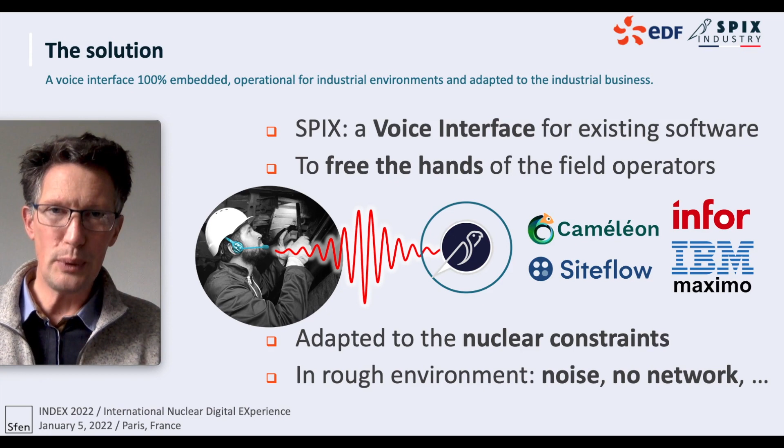Of course, there is noise everywhere, and it needs to be reliable, and there is no network. So we need to cut the internet wire and have a system that is efficient in such an environment. So the voice assistant from SPIX Industry is embedded, works offline in noisy conditions, and is operational whatever condition the user is confronted with.

So today we are in an experimentation phase with EDF on different sites under commissioning, with an interface between our voice assistant and Caméléon, which is the software used by EDF to generate all the reports from the site inspections. And the validation will be made for safety visit reports, which is a daily activity from EDF operators.

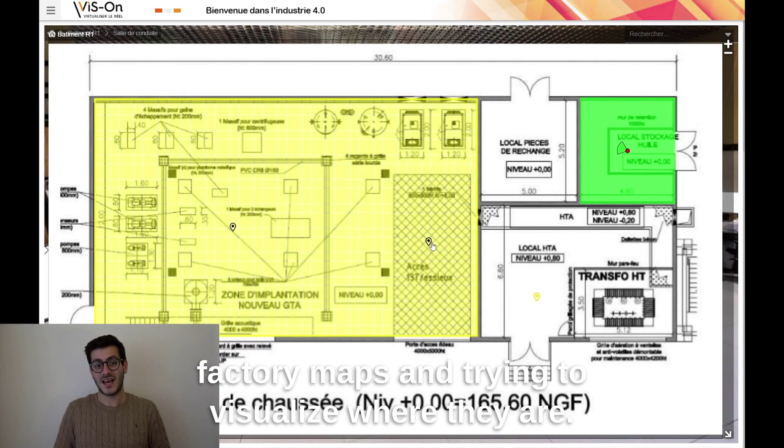How did SBS Interactive come about to create VIS-On? Our first hint was realizing that in the industrial world, the staff were always on the lookout for factory maps and trying to visualize where they are. And their maps weren't always up to date.

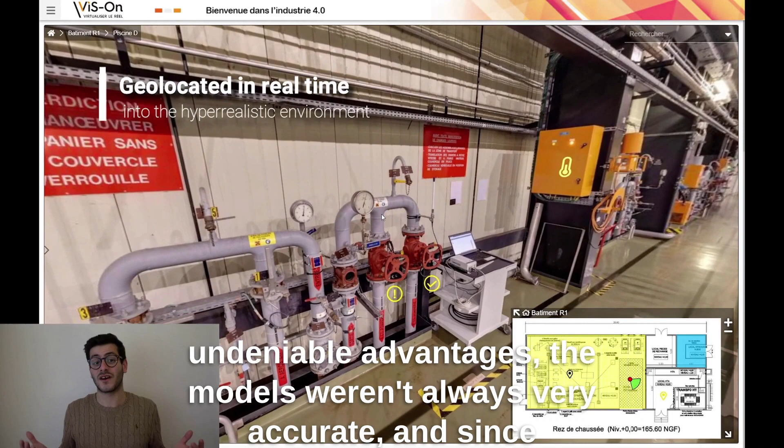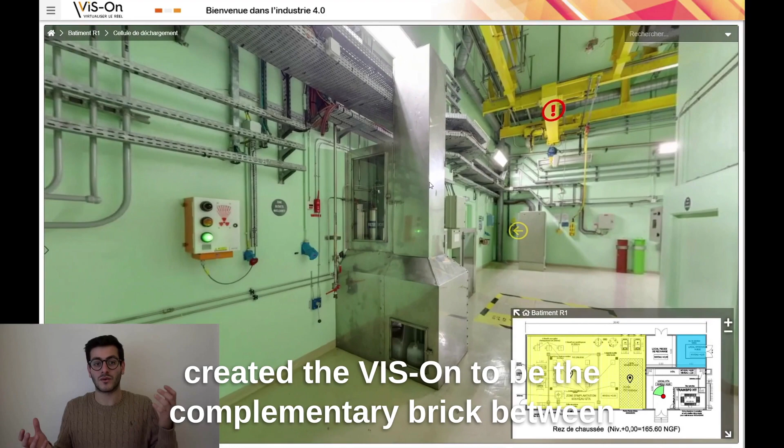Then came the 3D digital models, but with those undeniable advantages, the models weren't always very accurate. And since the projects tend to be time consuming, it came with a hefty price tag. That's when SBS Interactive created VIS-On to be the complementary brick between the blueprints and the 3D designs.

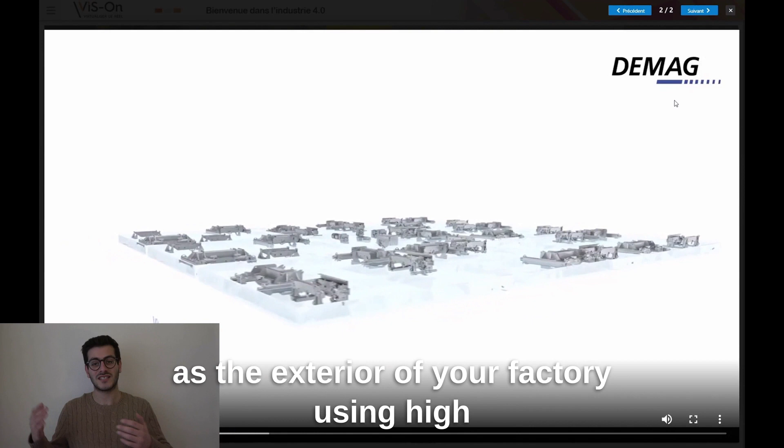The goal was to stay as accurate as possible to the real world. It can be operated simultaneously by all the staff. It's also a collaborative platform where users can create new projects, add documents, or link it to other platforms or applications. VIS-On lets you navigate the interior as well as the exterior of your factory using high-resolution 360 photos or 3D scans.

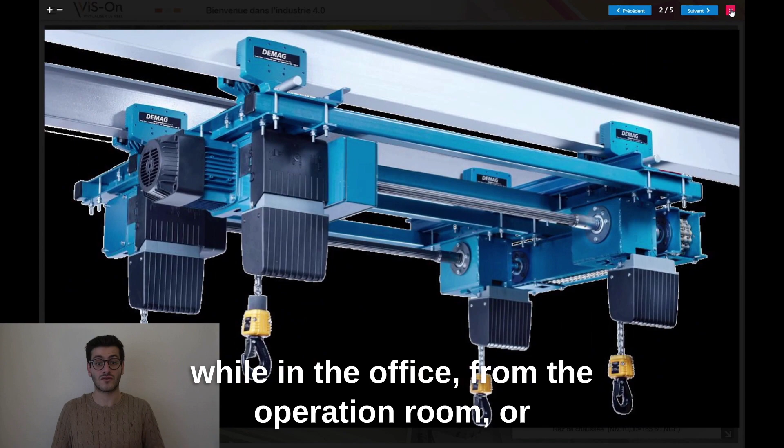VIS-On is a supervision tool that you can use while in the office, from the operation room, or even while on a mission on site. You can visualize instantly using 360 photos and have access to all the necessary information and digital tools through a laptop, a touchpad, or even a smartphone.

It helps the maintenance staff understand all the aspects of the repairs that need to be done, to know all the security instructions, but also get informed on any radiological risk.

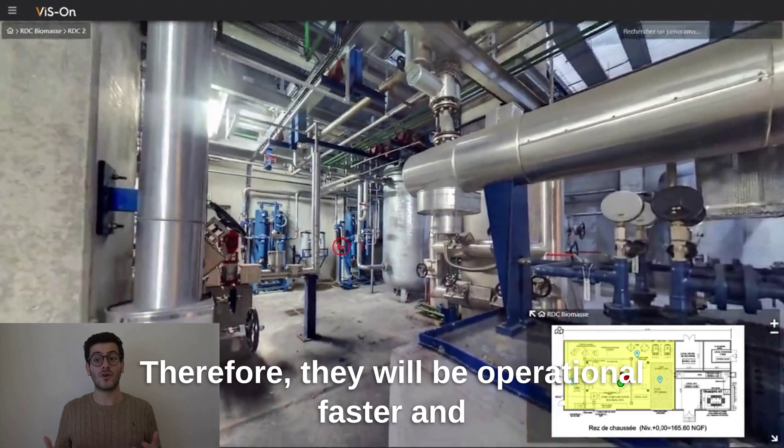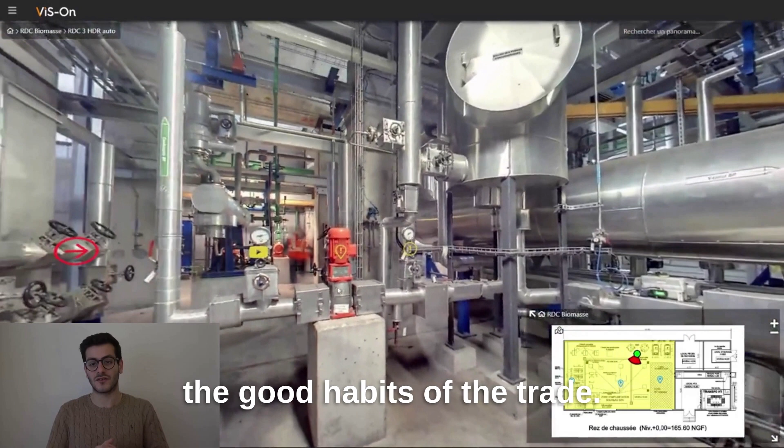VIS-On will accompany the newcomers during their first hours so that they can familiarize themselves with different environments of the factory. Therefore, they will be operational faster and we can limit the chances of error. Furthermore, the new apprentices will have access to tutorial videos accessible through VIS-On to pick up the good habits of the trade. VIS-On was created to handle security on big-scale projects, nuclear sites, or even industrial plants.

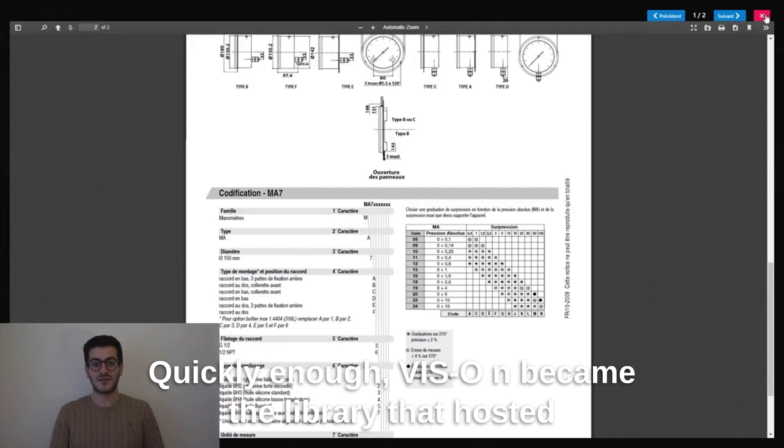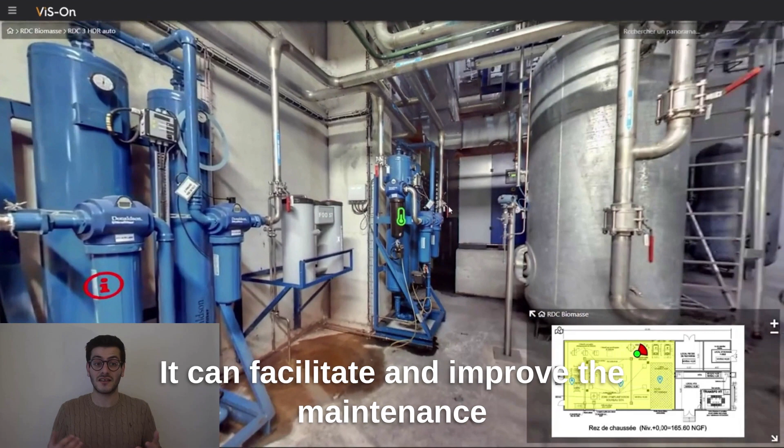Quickly enough, VIS-On became the library that hosted easy access to all the technical information. Then we created a link between VIS-On and computerized maintenance management systems, also known as CMMS, to be able to identify all the equipment, the history of all the maintenance staff intervening on each instrument, and a documented maintenance memo. It can facilitate and improve the maintenance of the equipment, but also inform quickly the staff about any malfunctions.

VIS-On also integrates a mode with supervision over a site, with an update on all configurations and thus have the history of all the modifications.

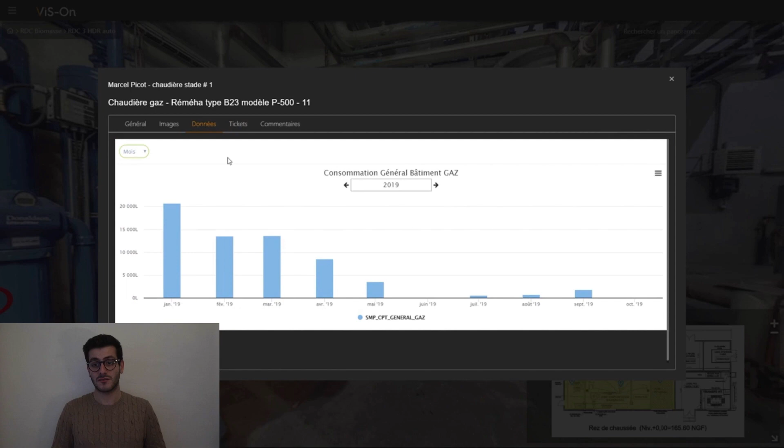SBS Interactive offers the option of hosting all the data on our own servers, but considering the high importance of the data of our clients, we can provide the option of hosting everything on the company servers. For more than 15 years, SBS Interactive has been developing the VIS-On software to meet the security constraints of our nuclear and defense customers and guarantee a high level of confidentiality.

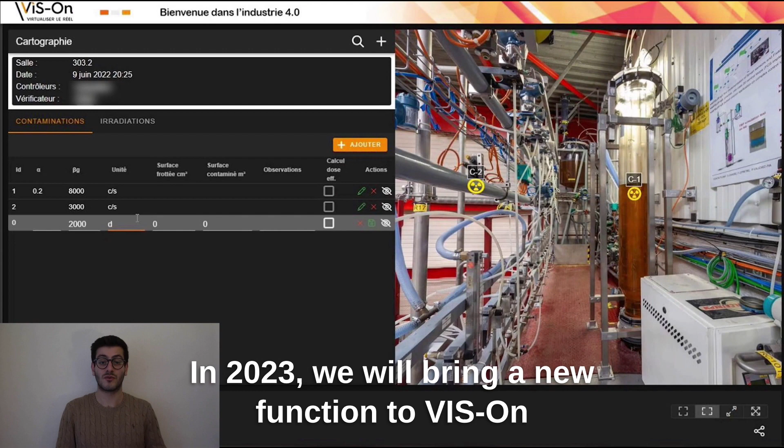In 2023, we will bring a new function to VIS-On, the possibility to add radiological zones not only on the maps but also on the 360 degree photos. Indeed, the radiation protectionist will be able to add radiological measurement points directly and easily on the 360 degree photos.

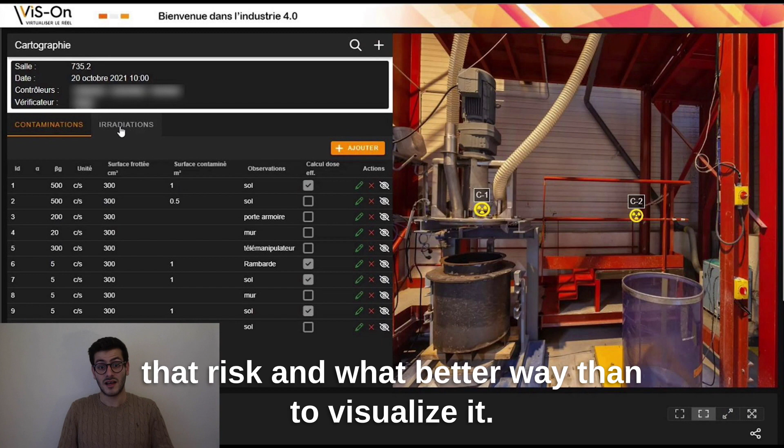It's very important to know exactly where the radiological risk is in a room and what is the importance of that risk, and what better way than to visualize it. Moreover, as VIS-On is shared with all the teams, users can know the latest radiological values measured and thus avoid unnecessary risks and take all the precautions.

Problem and challenge of plant operators. All power plant operators have the same problems. They have a huge number of industrial assets like pumps, valves, pipes, and heat exchangers. Due to some constraints like design, manufacturing mistakes, and/or operational loads, etc., some production relevant power plant assets can fail earlier than expected. And as a consequence, they can reduce the productivity and cause a higher operational cost.

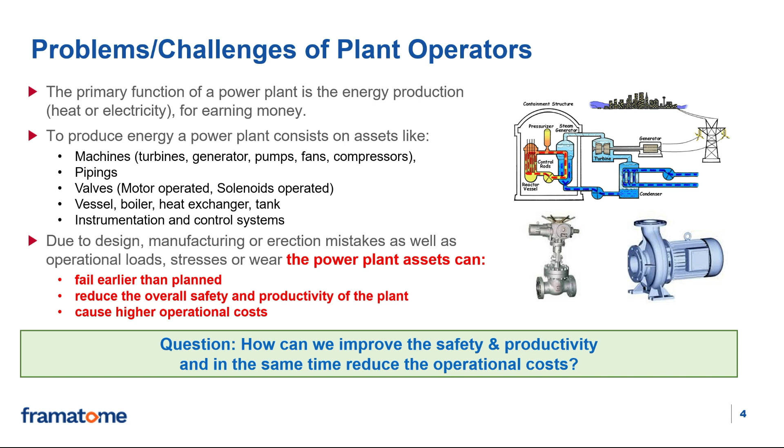So, to improve the productivity of the plant and at the same time reduce the operational cost, power plant operators have to collect equipment data. The first objective of the data collection is condition monitoring for early fault detection. The second objective is data analysis for problem investigation and confirmation. The third objective is diagnosis of critical severe problems, estimation of the remaining time to failure, and recommendation of remedial actions. The fourth and last objective is to verify the correctness of the maintenance activities and the accuracy of the diagnosis.

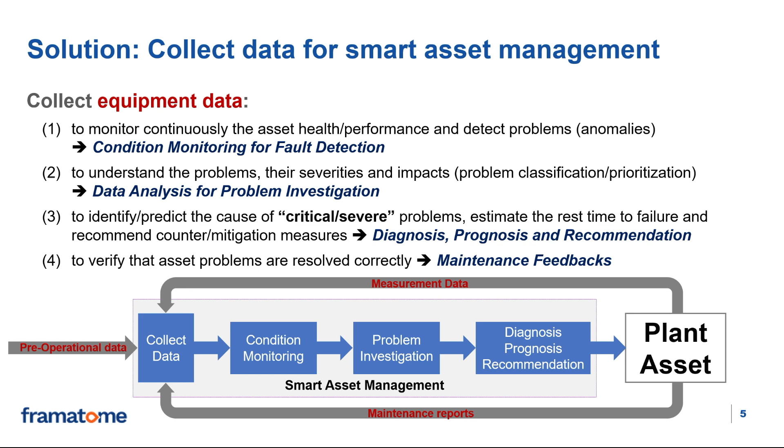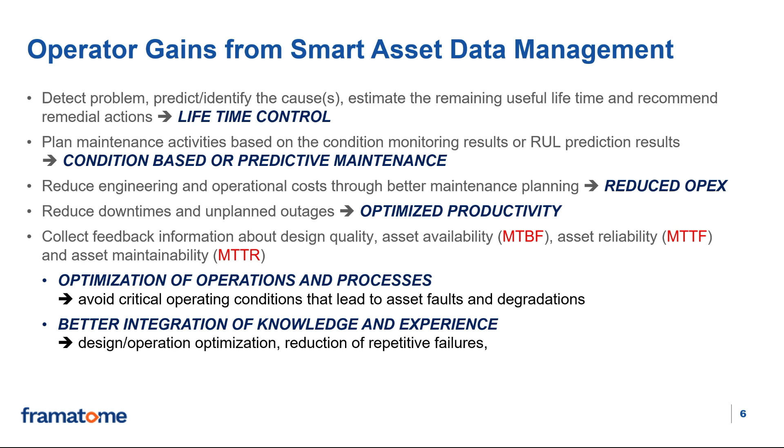The expected gains from a smart asset management are better asset lifetime control, better plant maintenance and engineering activities, reduced operational cost, optimized productivity, optimization of operation and processes, and better integration of knowledge and experiences.

So now, what's the Framatome solution?

Framatome Lifetime Department offers products and services for data collection, condition monitoring, diagnostics, and data-driven maintenance.

We have monitoring solutions for the reactor coolant system based on vibration monitoring, acoustic loose part monitoring, and leakage monitoring. These solutions are commonly requested by safety regulation. In addition, we have monitoring and diagnostic solutions for rotating machinery like pumps and non-rotating machinery like pipes and heat exchangers, as well as solutions for motor operated control valves.

Finally, we also offer a fatigue monitoring system named FAMOS-E. All of our M&D systems acquire, monitor, and store different kinds of sensor data, which can be exported as condition and/or process data using standard communication interfaces.

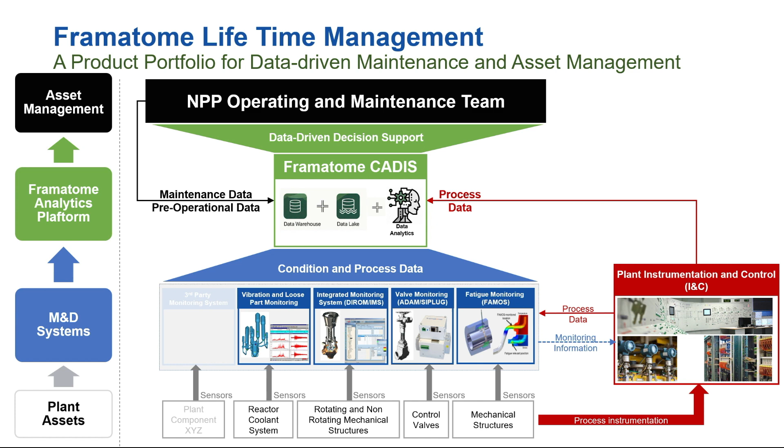To improve the intelligence of our M&D system, we have been developing a data analytics platform solution called CADIS for several years. This solution is currently used in two ways: internally at Framatome as a standalone system, and externally in power plants in combination with existing power plant M&D systems, as you can see on the slide. So CADIS is a kind of configurable data storage and digital intelligence that automatically transforms collected equipment data into diagnostic information and analytic insight for decision making and plant asset optimization.

CADIS requires measurement data like condition and process data, as well as operational logs or maintenance reports. These data, also called raw data, are collected into the CADIS data storage. Then the raw data are transformed into diagnostic information or feature data using signal or natural language processing. After that, analytic insight like anomaly detection, fault pattern recognition, and RUL estimation are derived from the feature data using basic or advanced data analytics models.

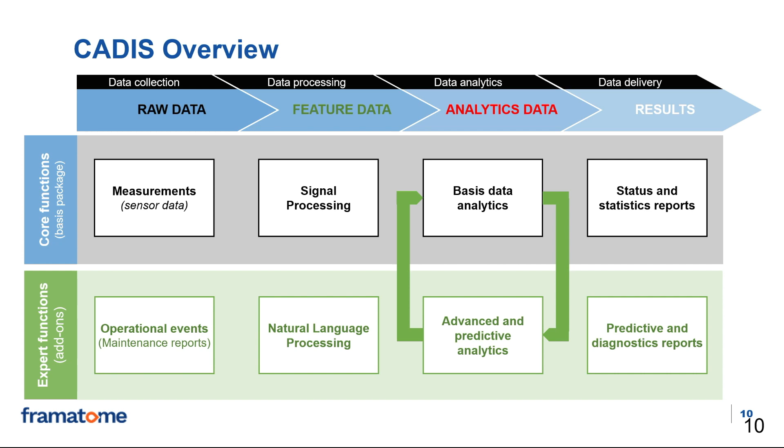Using plant supervision apps, plant operators and maintenance planners have at their disposal an online information system displaying required analytics and feature data of the CADIS system, helping them to understand, operate, and maintain the plant equipment better and make faster, more reliable decisions to reduce risk.

Using visual analytics tools like Jupyter Notebook, data scientists and data experts can access all CADIS data for data exploration, data understanding, and analytics model review and/or creation.

Using expert tools, diagnosticians like pump experts, valve experts, and primary circuit experts can review all data available inside the CADIS system for problem investigation, diagnosis, prognosis, and recommendation of remedial action.

Finally, to be mentioned, all data inside the CADIS system can be put at the disposal of connected third-party systems, the so-called CADIS data export, which is not shown here.

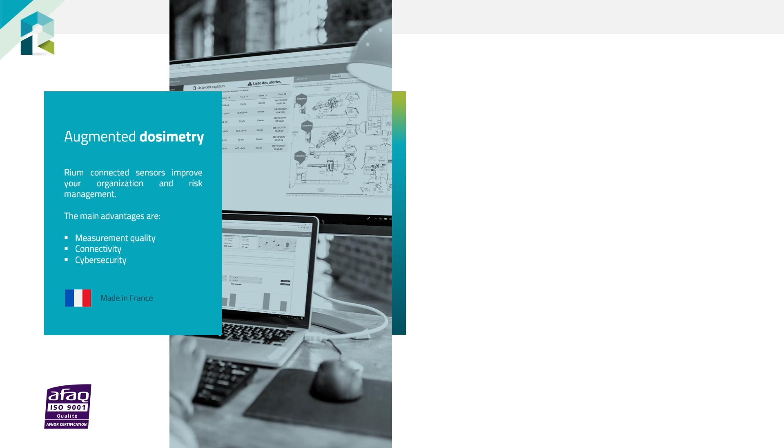Each of our sensors is based on 3 points: the first one is quality measurements, the second one is connectivity, and the third one is cybersecurity.

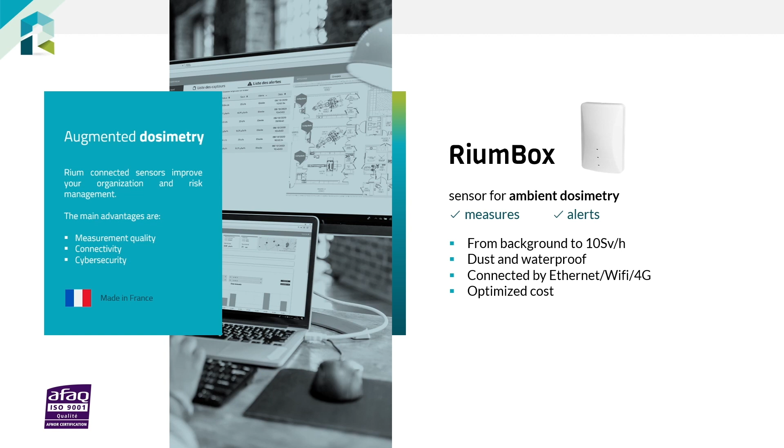RiumBox is our main sensor, which is designed for ambient dosimetry. It's a fixed sensor, connected for different applications in nuclear facilities and connected to 4G networks.

We also provide a surveymeter, connected to smartphones, which allows very high traceability and geolocation of each measurement, which is very good for improving quality in terms of radiation protection.

We also provide electronic personal dosimeters, designed for real-time measurements, improving the quality of measurement thanks to gamma spectrometry inside the electronic personal dosimeter.

Each of these sensors has airborne sensors with drones or other spectrometers. All this data is collected in real time in our software, called RiumWeb, which allows several dashboards, real-time alerts, and configurable alert thresholds. We also have a full data log of all your measurements, mapping functions, data exports, and other functionalities.

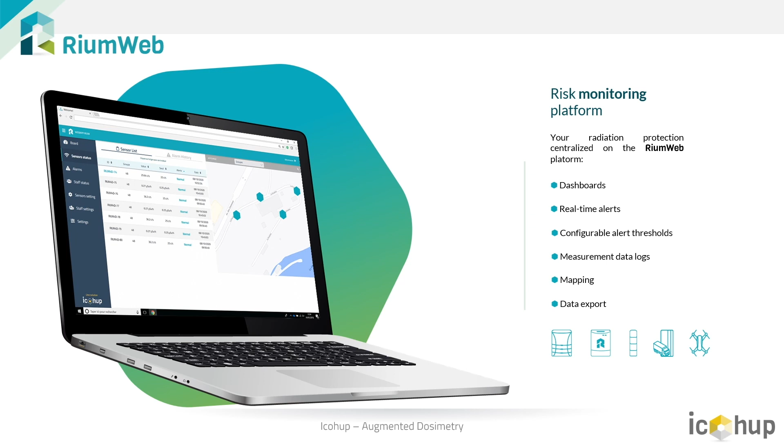I want to share with you 4 use cases in this conference. The first one is environmental monitoring.

In our nuclear facilities, lots of passive dosimeters controlled with surveymeters are used. We propose to replace this with our box, which is connected to ambient dosimeters, allowing the limitation of wasted time and also the capability to detect all events in real time.

The second point concerns measurements done with surveymeters on storage areas, mostly on the perimeters. This takes lots of time without any real-time information. So we propose to replace surveymeters with ambient dosimetry in real time, which allows time saving and real-time alerts in case of accidents.

The third use case is hotspots in case of unit shutdown or material transfers in nuclear facilities. We propose to track the dose rate with our RiumBox, which allows improved traceability and responsiveness in case of abnormal situations.

The last use case is monitoring the fouling of filters, valves, or other elements. Usually, for example, filters are removed when full from a mechanical point of view. We propose to monitor each of these elements with our real-time sensors, allowing replacement based on dose rate coherent with regulations, avoiding increasing the amount of high-activity waste, and making the end of process easier to handle.

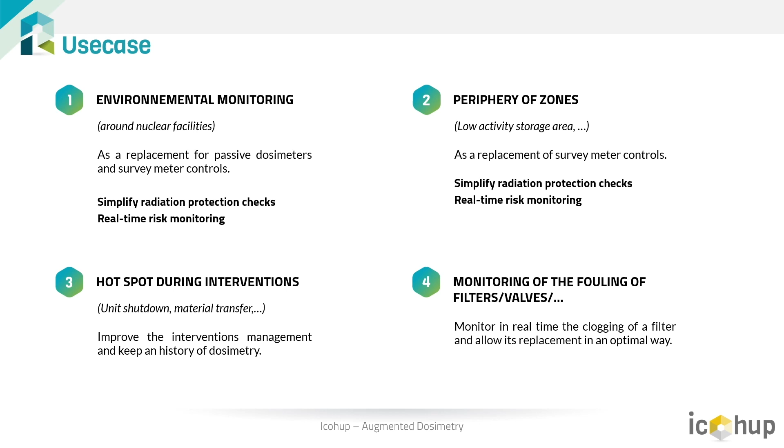All these use cases are possible because our sensors are very easy to deploy and quite low cost considering the technology we propose. We have several feedbacks about the use of our sensors in nuclear facilities. This is of course confidential information, so I want to focus just on global feedbacks.

About environmental monitoring, the feedback shows an increase in time reactivity in case of radioprotection events. About the budget, it shows money savings starting from 24 months of use of our systems.

The second feedback is about monitoring radiation in a corridor during a transfer of radioactive resin. Our technology allows immediate identification of radiation inside the corridor. It also allows very good reactivity in terms of decommissioning the zone at the end of operations, saving time and money during unit shutdowns, and providing good traceability of operations thanks to the history of all data on our servers.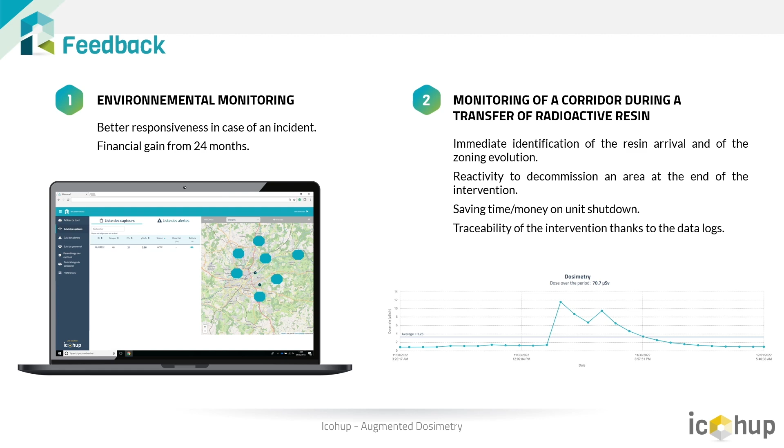Realigned stands for Robotic Enhanced Automated Landmarks Inspection and Georeferencing for Nuclear Environments Dismantling. I will briefly explain how it works and what it brings.

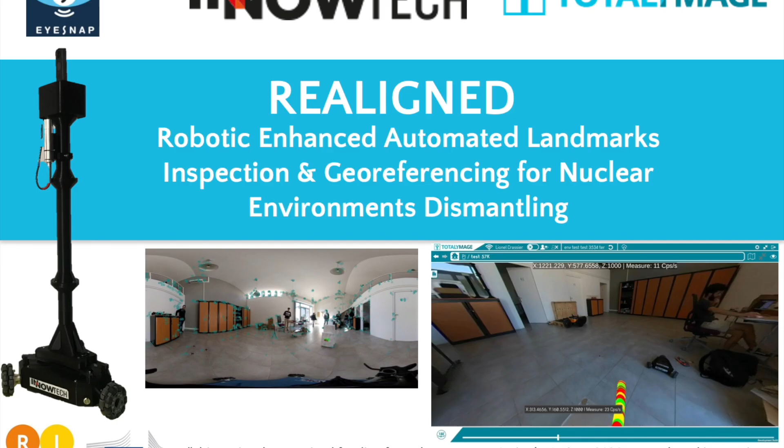An autonomous robot navigates a nuclear facility. This robot is equipped with a 360-degree camera and a dose rate probe in order to carry out its mission. The robot is wireless and operated through an HMI using Wi-Fi connection. It can be operated remotely, or it can navigate fully autonomously to discover its environment. During its mission, it performs dose rate measurement every meter or at specific points, and captures 360-degree video.

The embedded equipment can be adapted for different missions. For example, we can switch sensors.

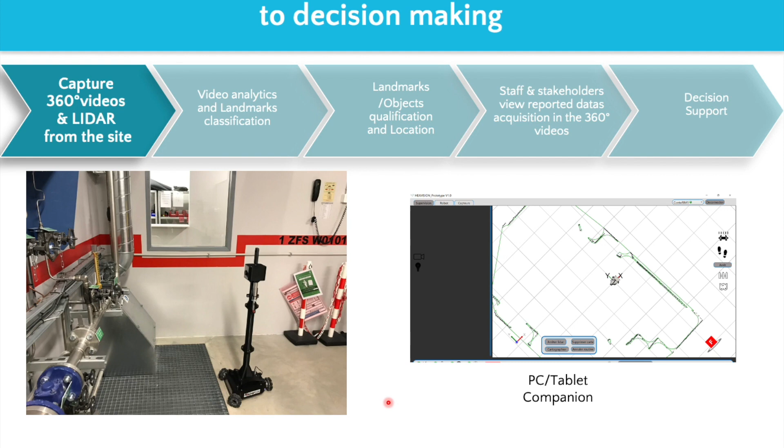The scene is analyzed in order to recognize and identify landmarks or specific equipment such as valves or fire extinguishers, as shown on the video. This is done using algorithms based on artificial intelligence. The identified landmarks allow for measurement positioning adjustment if needed. Identified equipment can be compared to their status in the existing referential, where any anomaly would be reported.

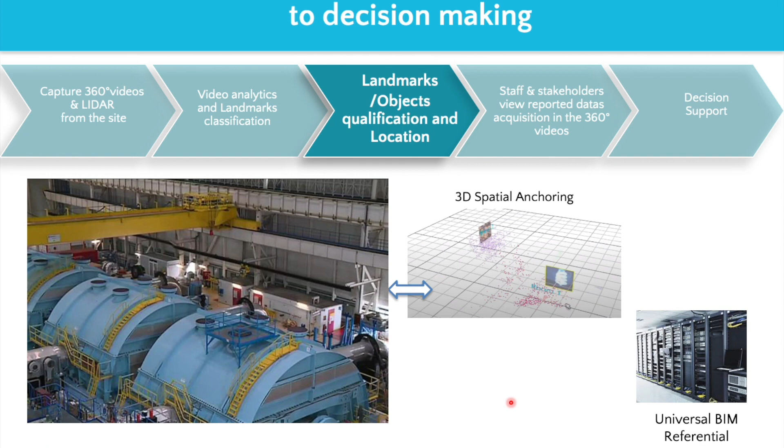Through the HMI, anyone can access the virtual environment, navigating through the 360-degree video with updated data on radiological measurement and the status of specific identified equipment. Alarms can be set if an anomaly is detected on a measured value or on the status of equipment, for example an opened valve which is marked as closed in the virtual twin.

Based on relevant, complementary, up-to-date data, the user is assisted in decision-making. Additionally, collected data can be used in specialized software.

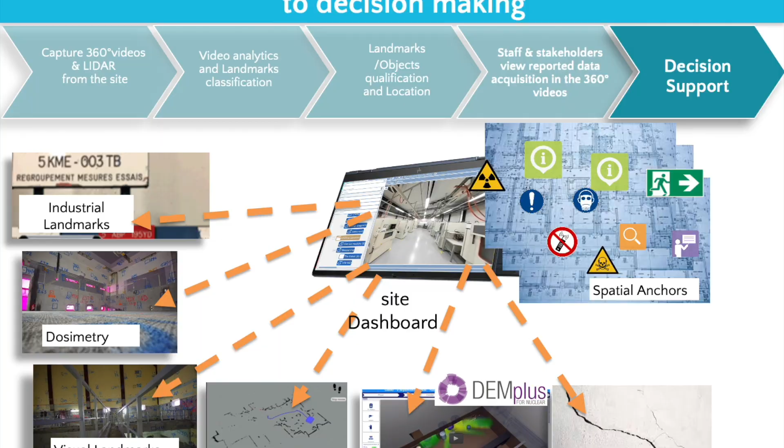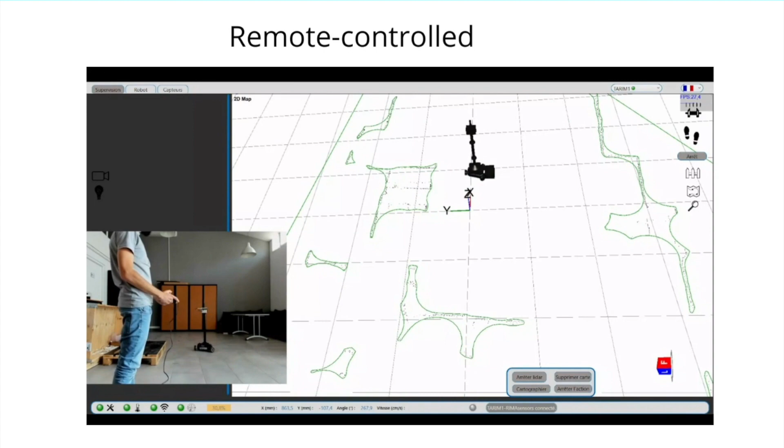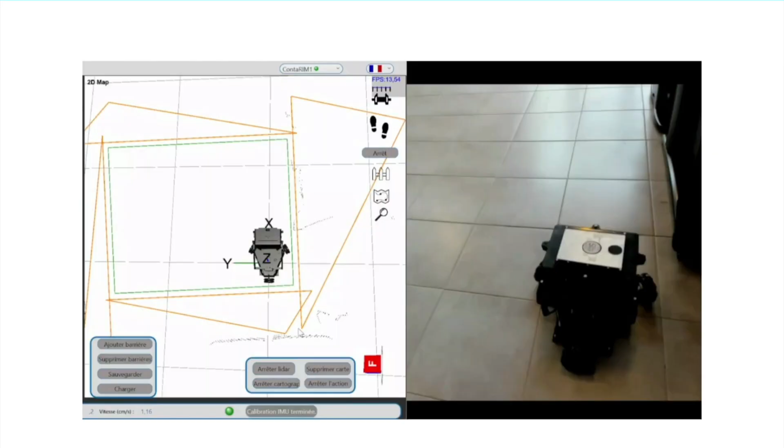You will now see a video presenting the features of the Realigned solution: the 3 ways to operate the robot. First, remote controlled using a joystick. Second, semi-autonomous with waypoints, where we define graphical coordinates on the map. Third, 100% autonomous, where the robot knows its environment and chooses its own path.

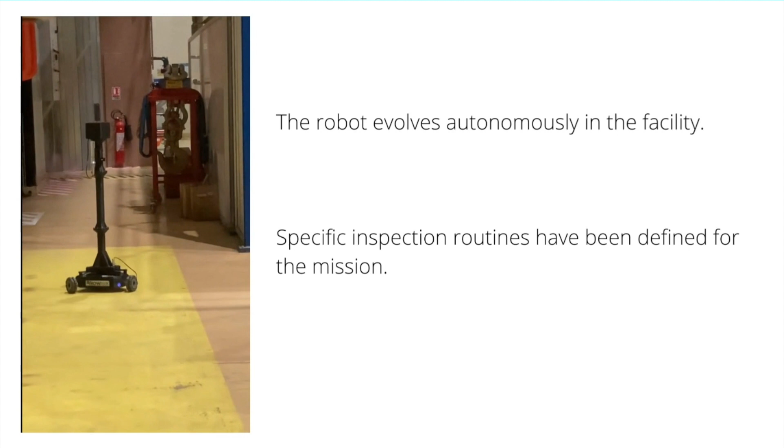The robot evolves autonomously in a facility. Specific inspection routines have been defined for the mission at SPIX. The video is analyzed using an AI algorithm that recognizes landmarks and specific equipment, such as the fire extinguisher shown here.

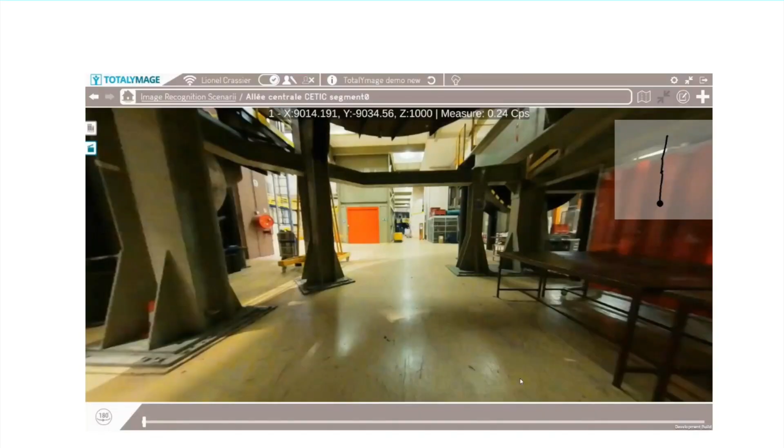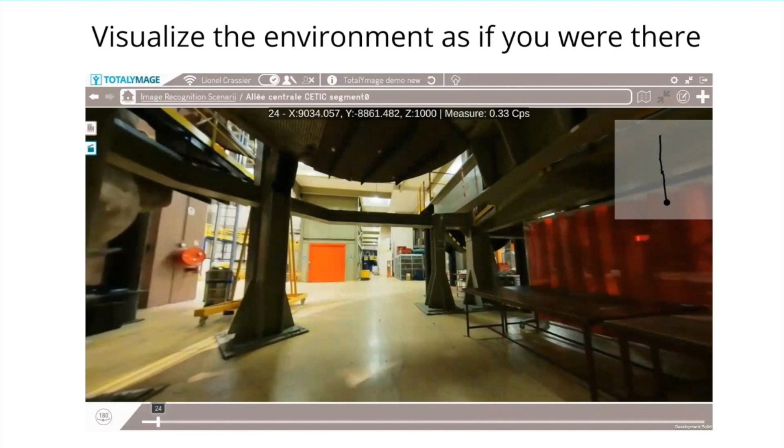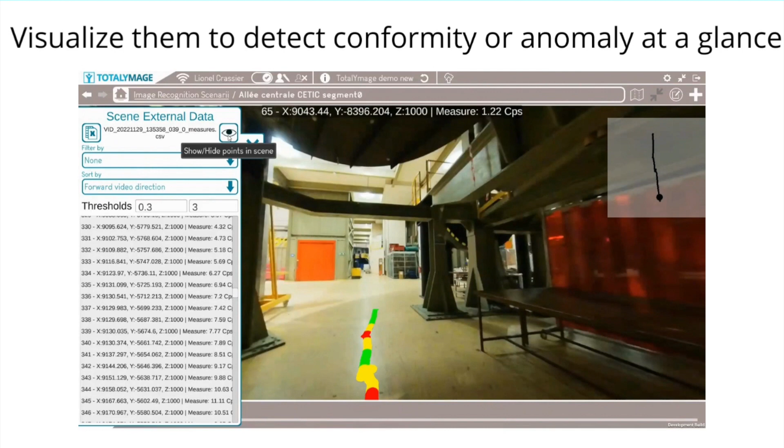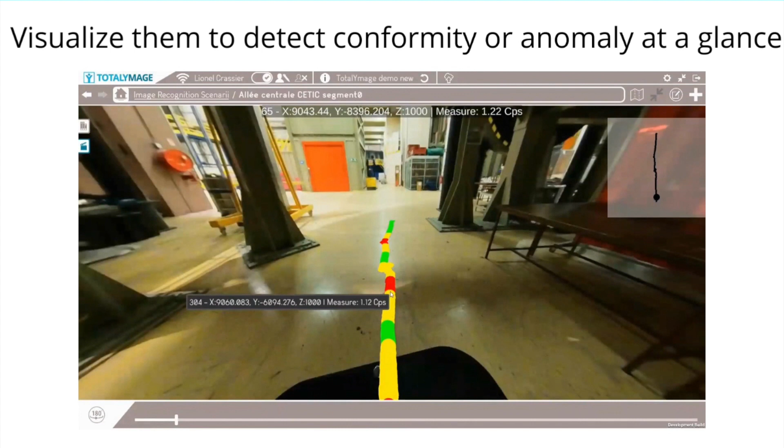One can visualize the environment as if being there. You can access all data with georeferencing and timestamping. You can also visualize them at a glance to detect conformity or any anomaly. You can access detailed information on specific measurements.

You will now see a video presenting the features of the Realigned solution tested in an operational environment at SPIX.